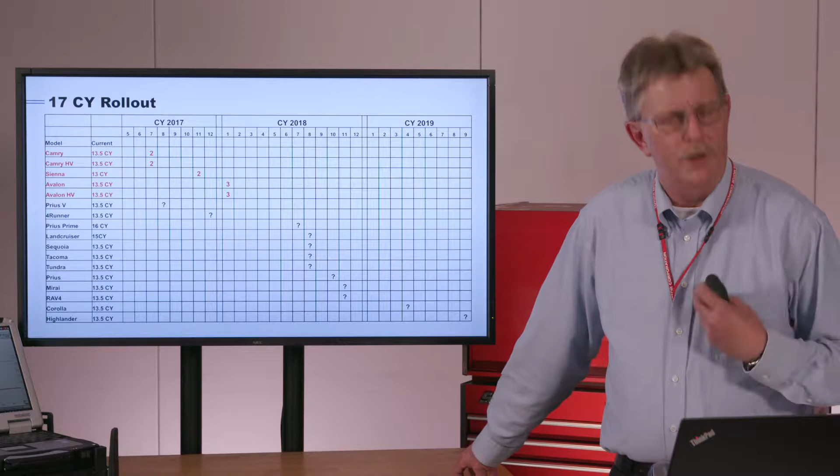Let's begin. This slide shows that 17CY introduction is rolling out in phases. The first phase, not shown on this slide, was the Lexus LC500 and LC500H, the one and only Phase 1 car. The 2018 Camry is the very first Phase 2 car, and in a minute we'll talk about the features included in Phase 2 and Phase 3.

You can see items in red on this slide. We're relatively sure of dates, features, and functions for those. Items in black indicate that we intend to roll out 17CY across the model line over the next couple of years, but the actual dates and models are subject to change. The items in red, we're really sure about.

You can see Camry rolling out in July of this year. Later this year, Sienna will roll out, and then early next year, as a 2019 model, the Avalon. This is a quick summary of the features and phases.

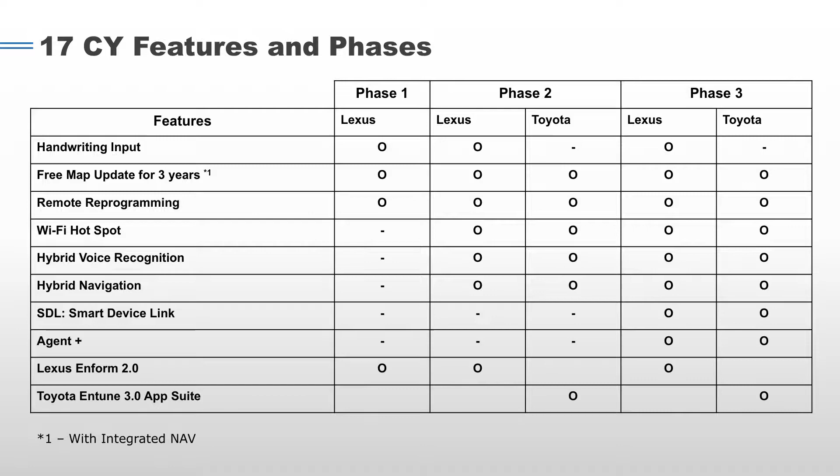Phase 1 with the Lexus includes handwriting input. Unfortunately, we will never get handwriting input as part of Toyota, since that depends on the remote touch that Lexus uses for handwriting input. There's also free map update for 3 years, which we'll talk about in detail.

That free map update feature is tied in with dynamic nav and dynamic POIs. Remote reprogramming is a possibility, though how that's actually implemented is not defined right now. Wi-Fi hotspot: the 2018 Camry is the first Lexus or Toyota vehicle to have an onboard Wi-Fi hotspot. Hybrid voice recognition and hybrid navigation are two features that are part of the premium package, and we will again talk in detail about those.

Smart Device Link is a Phase 3 feature rolling out, similar to some Apple or Google car telematics programs that let you add third-party applications to your cell phone and have them interface with the car. And for us, Toyota Entune 3.0 App Suite is a new version of the App Suite you're familiar with.

This slide is a representation of T-QTG-616A-D, which hopefully you're already familiar with. This quick training guide we produced is titled Entune Head Units. The update covers 2012 to 2018 model years, and we've had to make some minor changes to the formatting of the quick training guide to accommodate 17CY.

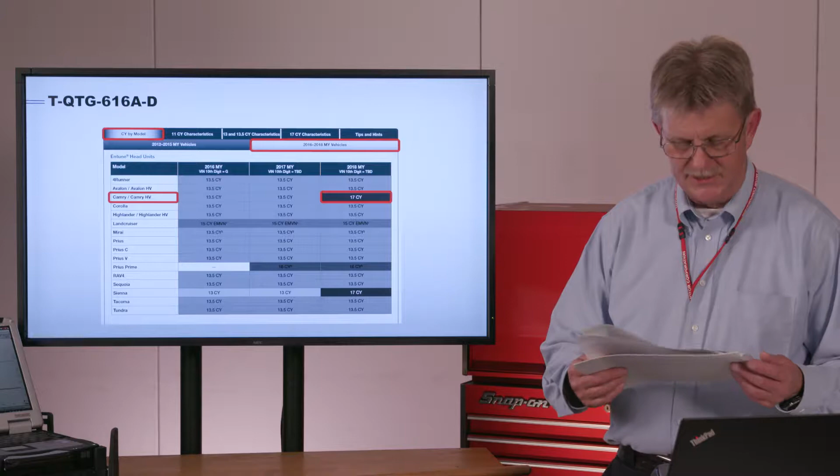One thing we added is a calendar year by model page or tabs that you use to identify which system your particular car has by looking at the car model and model year. We broke this up into two separate tabs: one for 2012 through 2015, and one for 2016 to 2018 model year vehicles.

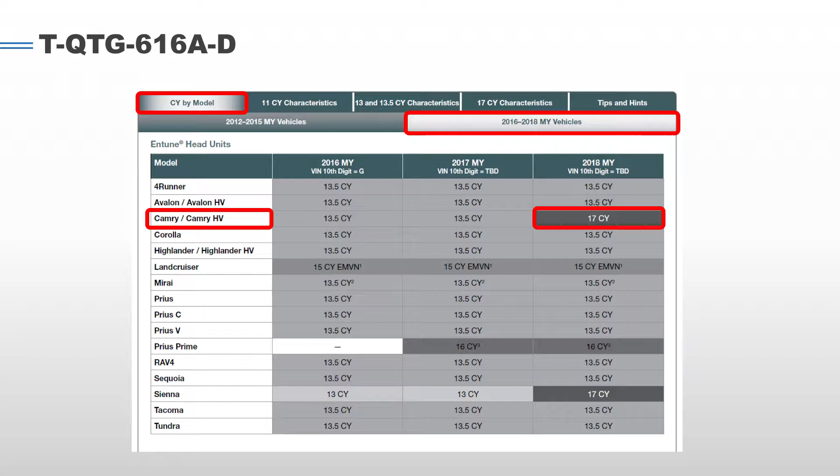Camry and Camry HV are the ones we're specifically talking about, and it shows those have a 17CY system. There's now a dedicated page for 17CY characteristics, and luckily we're still able to identify head units by specific physical characteristics on the head unit.

So, first and foremost, one of the big issues is: what system am I working on? By simply looking at the head unit and looking for the presence or absence of certain features, you can identify which one of the three different Entune 3.0 systems is included in this particular car.

We're looking for a CD slot. Does it have a CD slot? If it has no CD slot, it's Entune 3.0 Audio, the base system. If it has a CD slot but no map button, it's Entune 3.0 Audio Plus. And if it has a CD slot and a map button, it's Entune 3.0 Premium Audio.

Similar to the way the rest of the characteristics pages in the quick training guide are laid out, we talk about specific hardware features, specific unit names, information you need to find the correct reference document in TIS, in the repair manual, in the new car features, in the wiring diagram. We talk about features and functions, hardware. Does it have a separate amplifier? Is the amplifier encased in the head unit?

Here's a couple of new terms, DCU and MEU. You're going to have to learn those terms. We talk about whether they have HD radio, whether they have nav traffic, whether they have Sirius XM. So as a reference piece to figure out which system you have and what features and functions that system has, this is a very valuable reference piece.

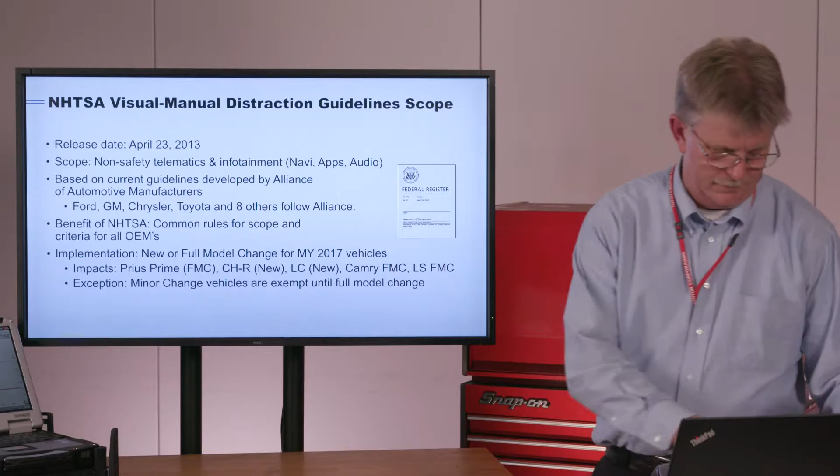This is a corporate decision to follow these guidelines. The decision is based on reaffirming our commitment to safety, our top priority, and consistent with our design philosophy to limit cockpit distraction. So this was approved by the TMNA CEO, the TMNA president, the research and development president. This is approved and implemented at the very highest level.

NHTSA driver distraction guidelines are, again, released in phases. Phase 1 involves the cockpit interface and the original equipment manufacturers. Phase 2 guidelines are related to portable electronic devices, and Phase 3 guidelines are related to voice commands.

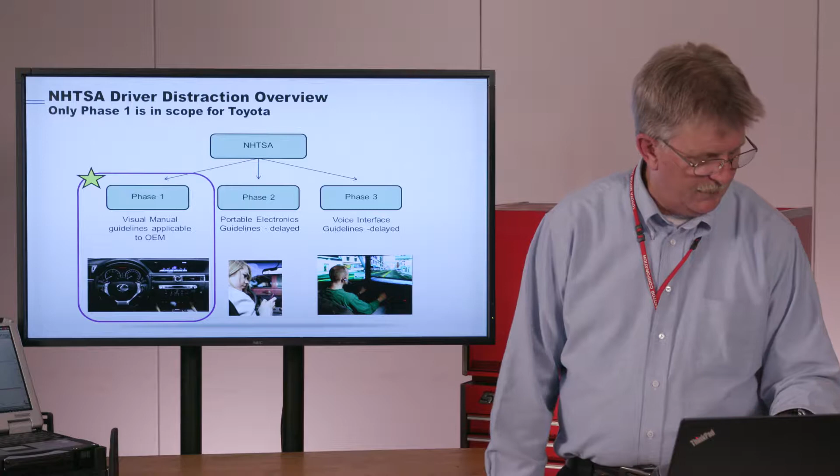In the student handbook version of this, there is quite a bit of detail taken from the original NHTSA guidelines document. If you're interested in the background, some of the standards, how the tests are developed and things like that, I would recommend you at least start with the student handbook, and you may even want to refer to the original document for the guidelines.

Our design standards mean that 3D maps, detailed images, the phone keypad, messaging, and text entry will no longer be available while the car is moving.

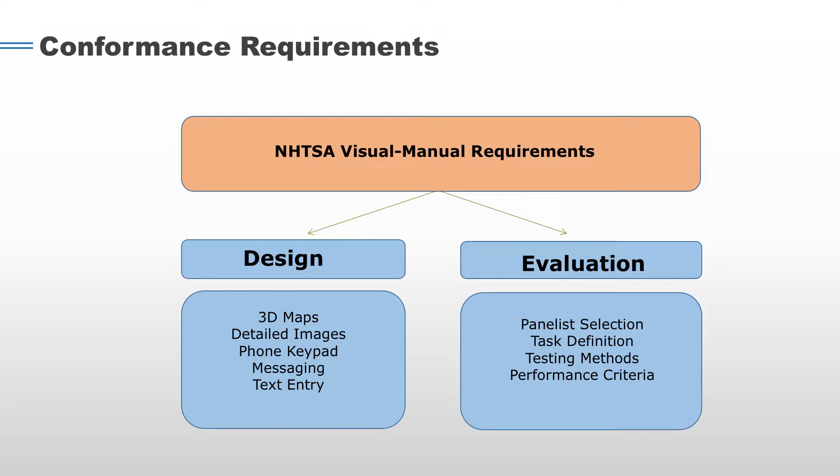The evaluation is done by a group of panelists, and we'll talk a little bit about selecting the panelists, how they define the tasks, what test methods they use, and some of the performance criteria as they work to minimize the distraction of using or operating the infotainment system in the car.

Some of the key guidelines: we have to reduce the task time limit. So the previous task time limit was 20 seconds, now it's down to 12 seconds.

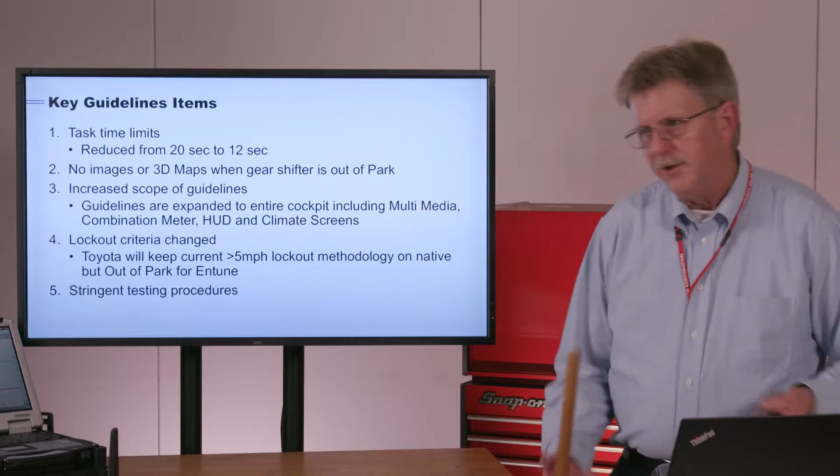No images or 3D maps when the gear shifter's out of park. Gear shifter's out of park, or the other criteria you'll sometimes see is the parking brake is off and the car is moving faster than 0.62 miles per hour.

Increased scope of guidelines. The guidelines are expanded to include the entire cockpit, not only the stuff displayed on the information screen and navigation screen, but the multi-information display between the tachometer and speedometer is included. Climate screens, heads-up displays—the idea is to minimize distraction from the driving task.

The lockout criteria have changed, and the most liberal lockout criteria is 5 miles per hour. At 5 miles per hour, icons and the ability to manipulate or go deeper into levels and layers of menus will be locked out, and they have very stringent testing procedures and methodology established.

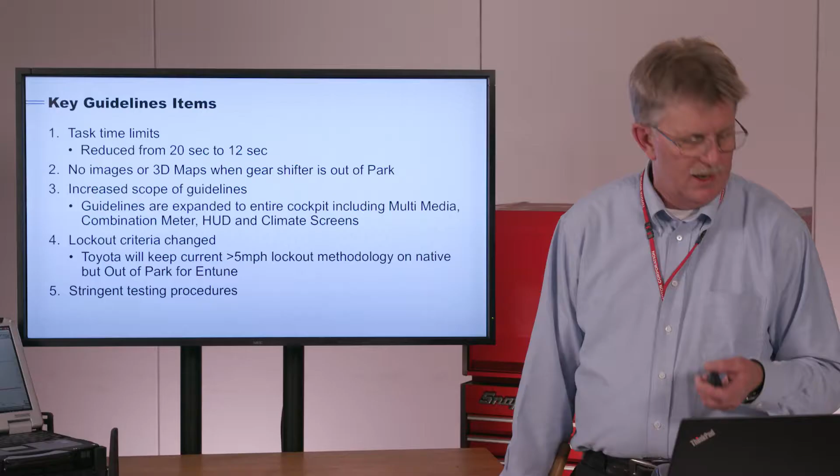In the handbook, there's a little bit more information. They have a method they call the occlusion method, and then they have a simulator that lets them track eye movements to make sure that during operation of these telematic system tasks, your eyes are able to remain on the road, focused on the driving task, versus glancing down at the screen to manipulate or operate it.

This next slide is a summary of changes in the specifications for driver restriction. There's what the 13.5 and 15CY systems did, and on the far right is the 17CY column.

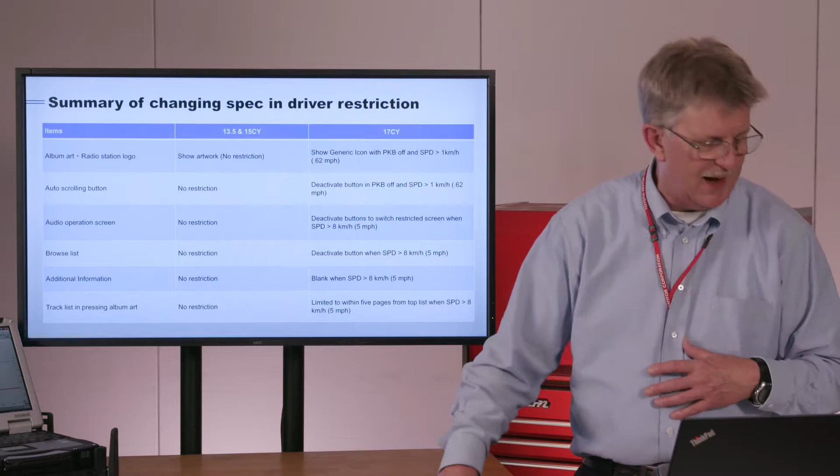Album art, the little pictures that showed what the cover of the album looked like, or a radio station logo or things like that, will disappear at 1 kilometer per hour, 0.62 miles per hour, to be replaced by a generic icon. Some of the scrolling features we'll look at in detail—auto scrolling, information buttons, things like that—are going to no longer be available. They'll be grayed out at 0.62 miles an hour.

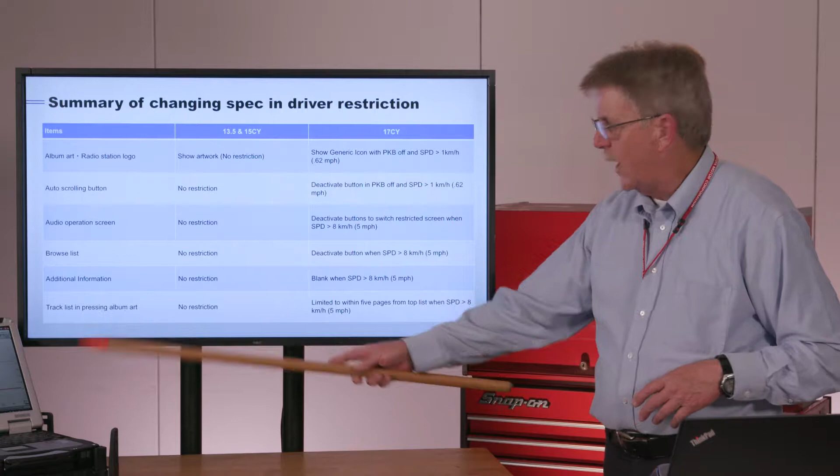Audio screen operations will be limited. Browsing lists will be limited. Additional information buttons will be limited. And track lists in album art will be limited.

Browse and additional information buttons: there used to be a browse section, and in your particular audio source you could browse through and see the artist list, artist name, by genre, whatever. Once the car starts moving again, at 5 miles an hour, that browse button is disabled. The additional information that would tell you about artist name, music title, radio station logos, and things like that—again at 5 miles per hour, that button is no longer available.

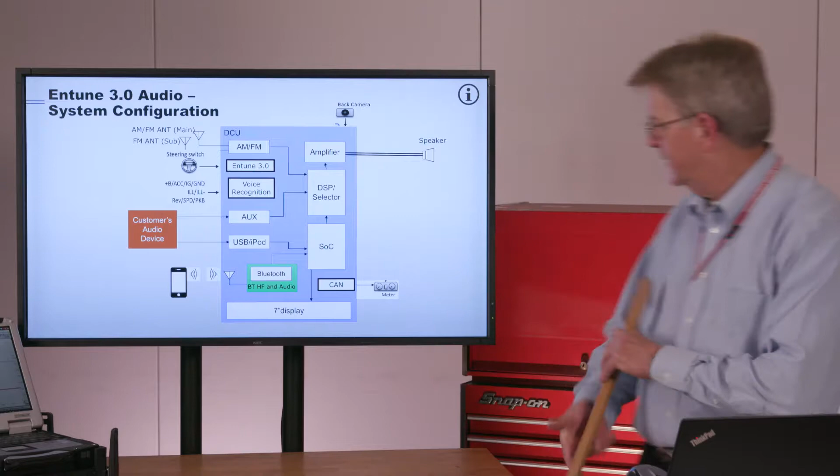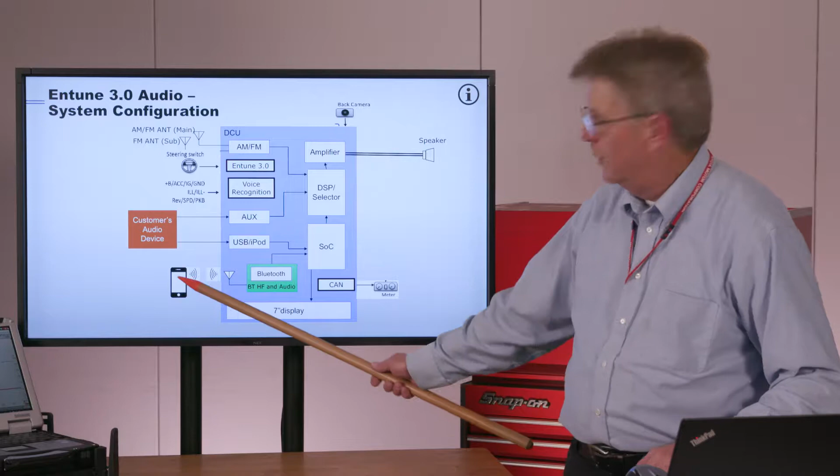CAN communication goes out to the meter ECU and the 7-inch display. The Bluetooth module and antenna are located inside the DCU, so there's a Bluetooth connection with the cell phone. The customer's audio device connects either to the aux or the USB port.

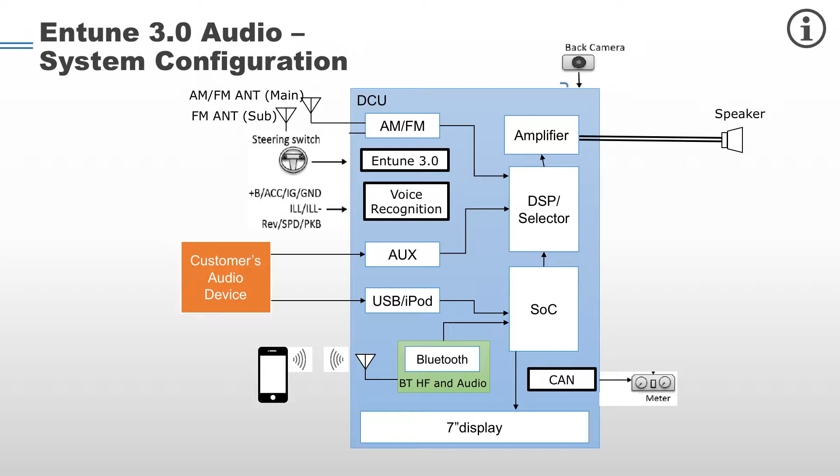All of these items, plus B, ACC, ignition, ground, illumination, reverse, speed, and the parking brake signal, are all discrete, separate, single wire inputs to that system. The steering wheel switches are a separate single wire input, and AM/FM antenna and sub antenna are outside inputs.

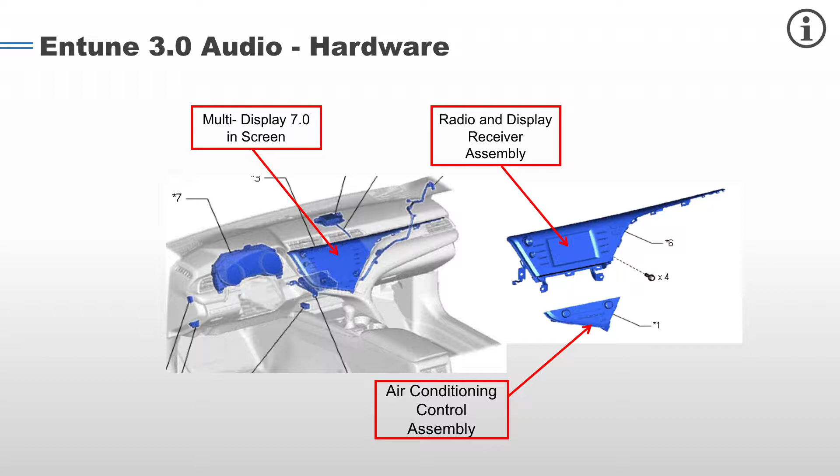Hardware: a 7-inch screen incorporated into this large piece of the dash, and this system only has a separate air conditioning control panel assembly. On the next two systems we're going to look at, the air conditioning control panel assembly is part of the radio and display receiver.

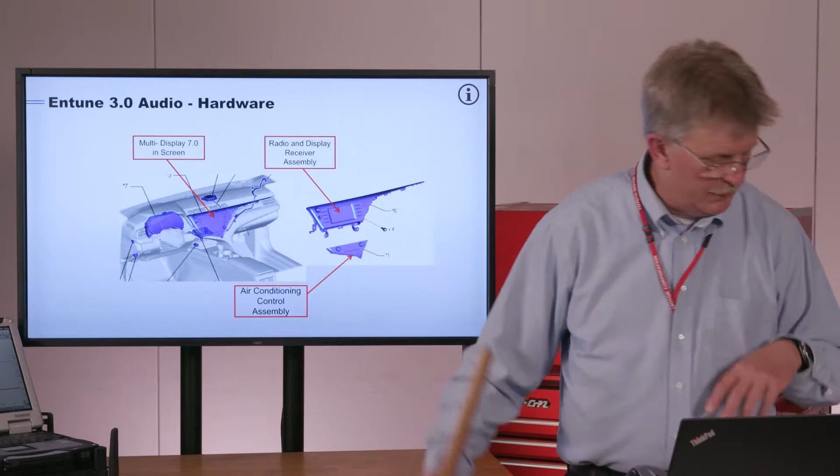There's no DCM, so we won't be pointing out where that's located. There's no navigation ECU — that's part of the premium system.

Stepping up to Audio Plus now, Entune 3.0 Audio Plus is the next level system up. This system adds some features and functionality. It incorporates a DCM, and the connected services become available.

The key identification characteristics: it has a CD player slot, but no map button. That means that's Entune 3.0 audio. 3.0 audio is also available with an optional JBL system — we'll talk a little bit about that.

Keys to identify: 8-inch touchscreen, CD player slot. It is DCM equipped, so connected services — Safety Connect, Service Connect — are available. The navigation system is, again, the app-based Scout GPS Link.

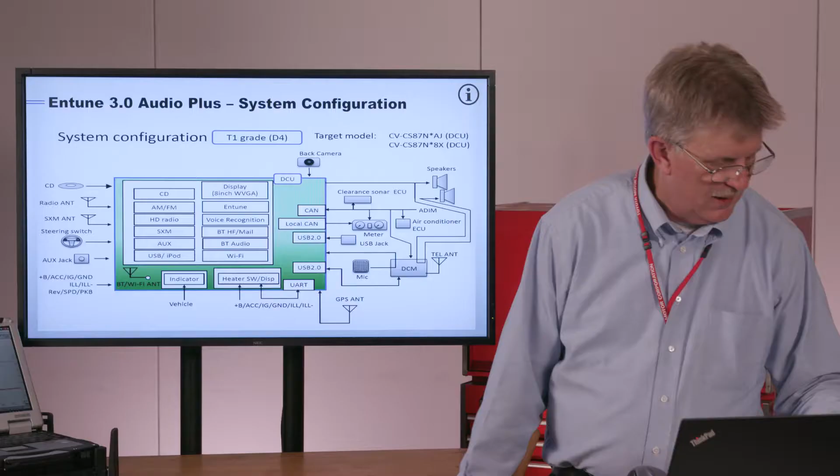The DCM is the component that enables the Wi-Fi. So our inputs, once again: radio antennas, steering wheel switches, the aux jack, plus B, accessories, ground, illumination, reverse signal - those are all discrete, separate wire inputs.

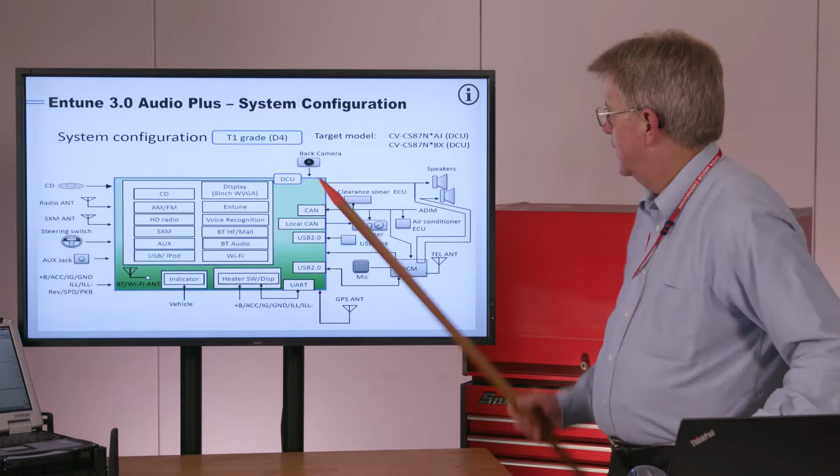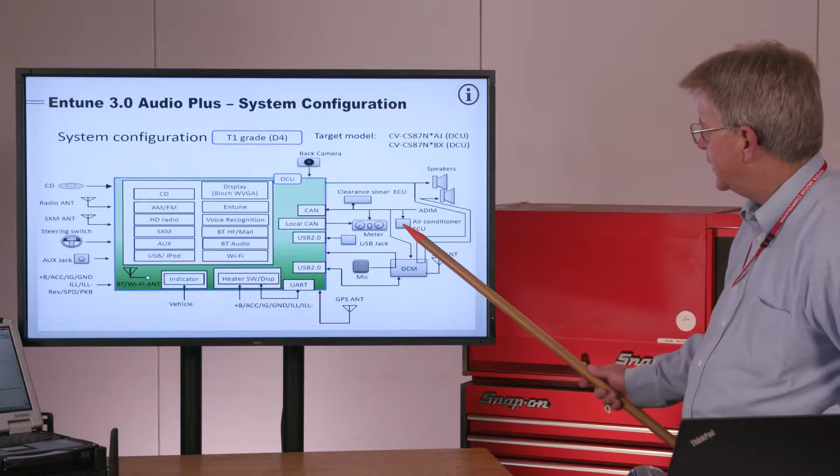Backup camera is a separate input, not through a network, through the NTSC standard. Speakers, we've got a local CAN to the meter, CAN communication out to the air conditioner ECU, and USB communication between the DCM and the DCU.

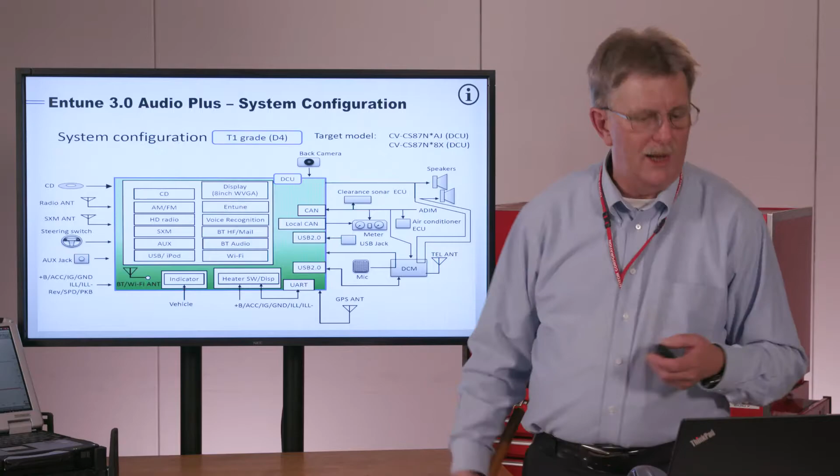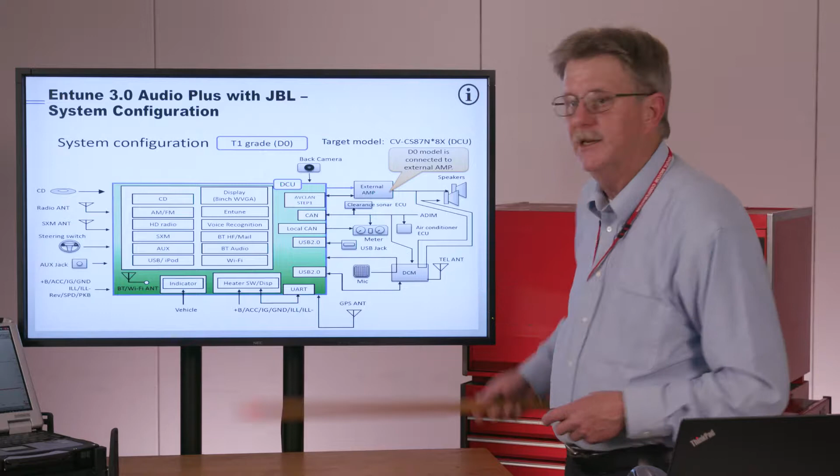Going from Entune 3.0 Audio Plus, our next slide is a system diagram for the JBL option, and probably the key piece right here is the external amp. The JBL option systems have an external amplifier located under the driver's seat. Again, the characteristics, inputs and outputs are similar, but instead of driving the speakers directly out of an amplifier located inside the DCU, we're driving the speakers out of an external amp located underneath the seat.

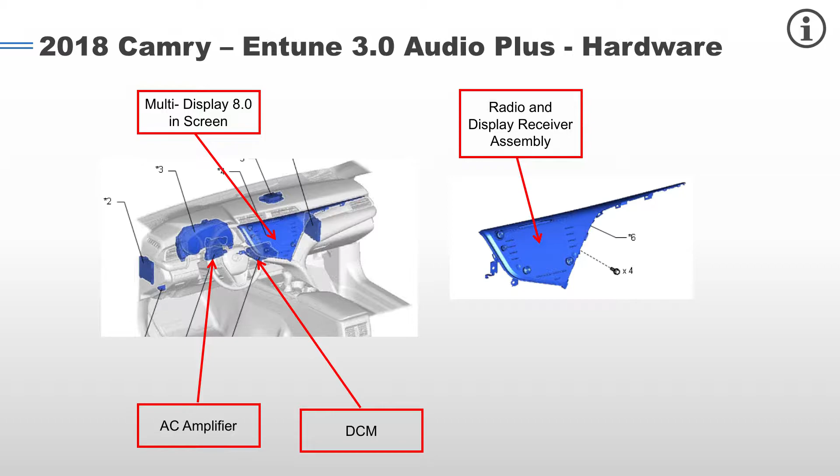JBL systems include 9 speakers. Hardware: again, we've got the big panel in the dash that includes the multi-display backed up behind or incorporated into the same unit, the DCU, the display control unit. Notice that the air conditioning input panel is not a separate piece in this system anymore.

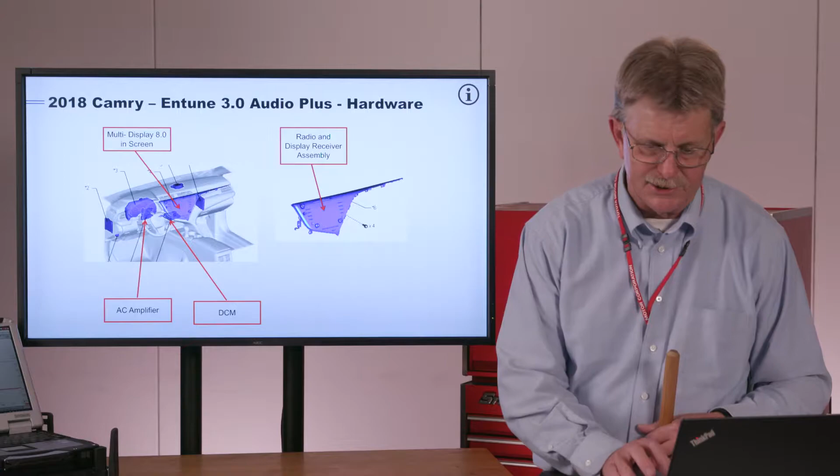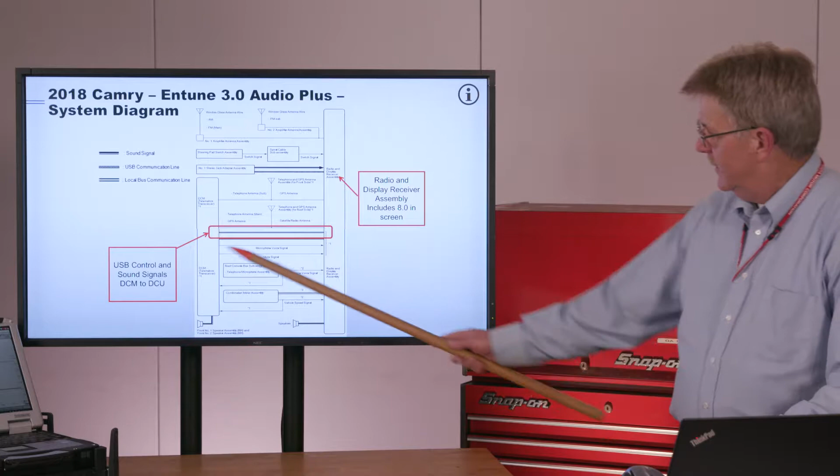Same block diagram you saw before, except this time we didn't block out the DCM, the data communications module, the telematics transceiver. Highlighted in red here are the USB control and sound signals that pass back and forth between the DCU, the display control unit, and the DCM, the data communications module.

Very top level system, Entune 3.0 Premium Audio. Key identification characteristics for this are a CD slot and a map button. This system adds an extra component and becomes much more like the traditional navigation systems that you're used to now. So, CD slot, map button - you've got an Entune 3.0 Premium Audio.

It has a DCM, it has all the connected services, plus the DCM enables the dynamic voice recognition, the dynamic navigation, and the other things we're going to talk about in detail.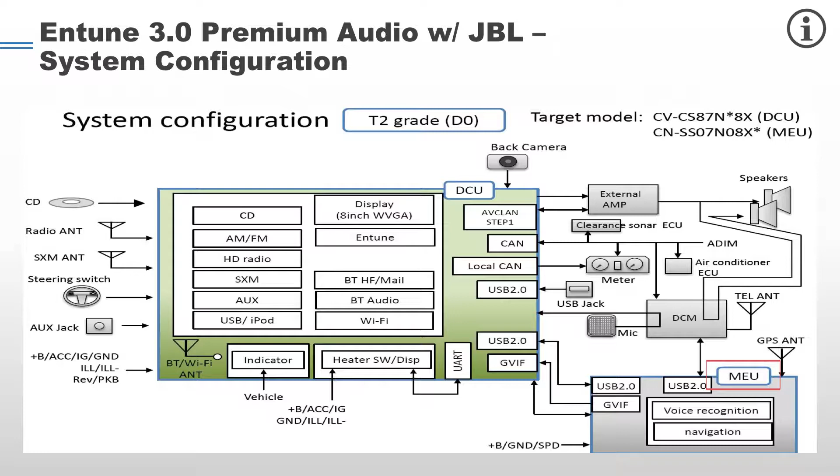Our block diagram shows that this particular model has this new feature. This is the key part of this diagram - another new term, MEU, Multiplex Extension Unit. The reason it's important that you remember or know about MEU is when we get to the diagnostics section.

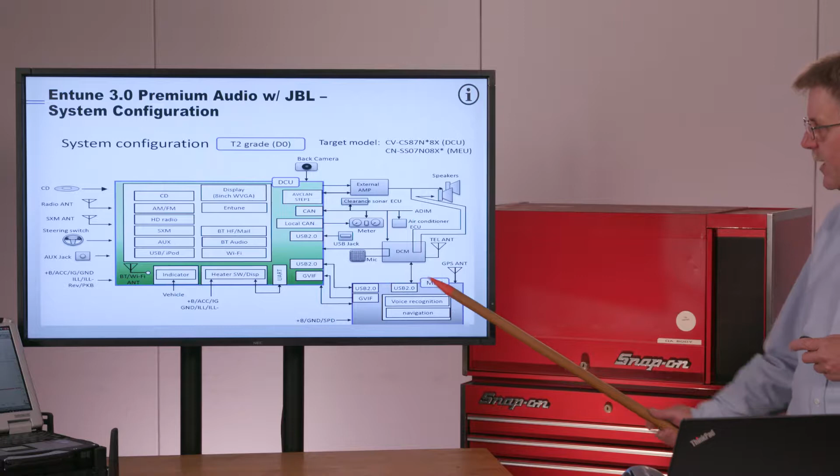If you pull up the on-screen head unit diagnostics, they're going to identify the units using this terminology. If you're looking for diagnostic trouble codes, if it's in the head unit, it's going to be listed under the DCU category. If it's in the navigation ECU, it's going to be listed under the MEU, the Multiplex Extension Unit.

Discrete inputs, again, like we talked about: plus B, ACC, auxiliary jack, USB communication. There are 2 kinds of signals that go back and forth between the MEU and the DCU - one is a USB 2.0 line, the other is GVIF, Gigabit Video Interface. The video images that show up on the 8-inch display in the DCU are transferred from the navigation ECU via a GVIF cable.

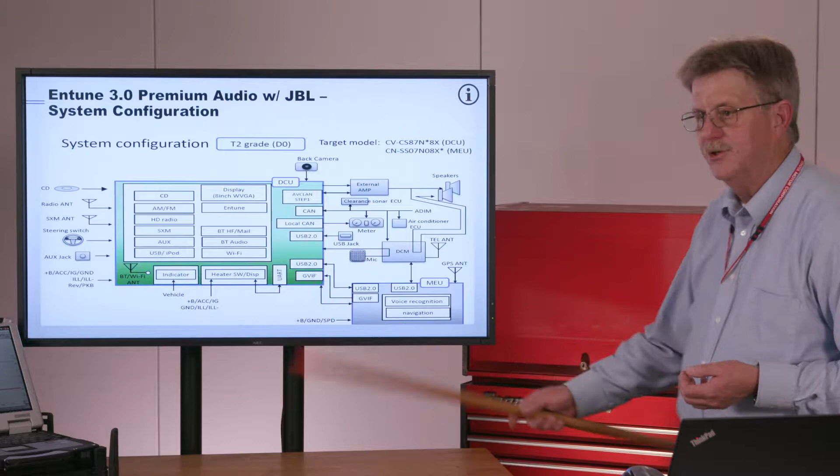It's a separate unit. We'll look at the location also. And then notice also now there's a communication link, USB 2.0, between the DCM and the MEU.

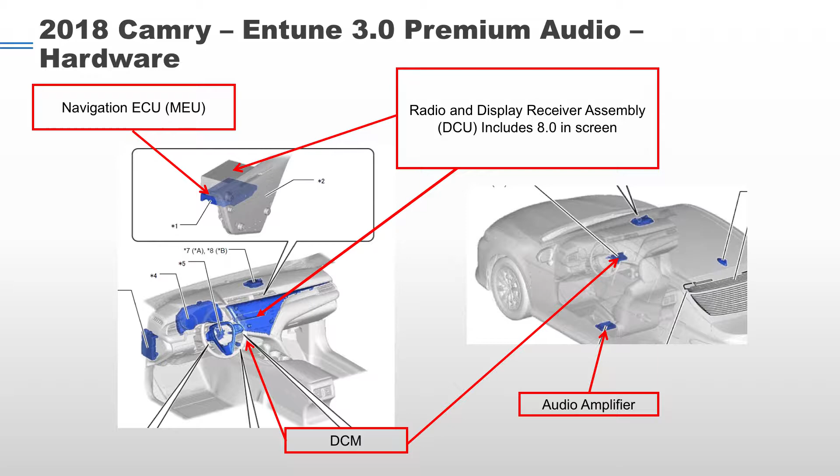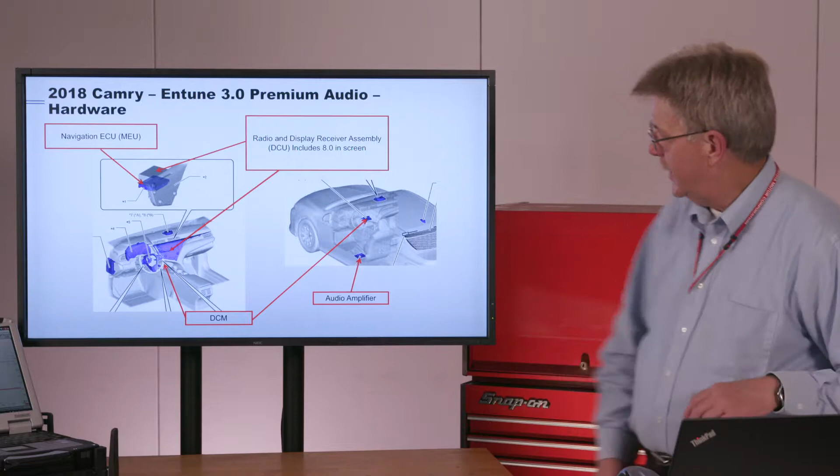Entune 3.0 premium hardware. Very difficult to see because it's tucked underneath the radio, but the DCM is in the same location in 3.0 Audio Plus and 3.0 Premium, and the additional unit piggybacked onto the bottom of the DCU is the navigation ECU, the MEU. The audio amplifier - this system has JBL like the Audio Plus with JBL - is located underneath the driver's seat.

System diagram on this one - we've zoomed in a little bit on it because it's very big. If you want to look at the full system diagram, remember that the repair manual and new car features book references are included in the printed handbook.

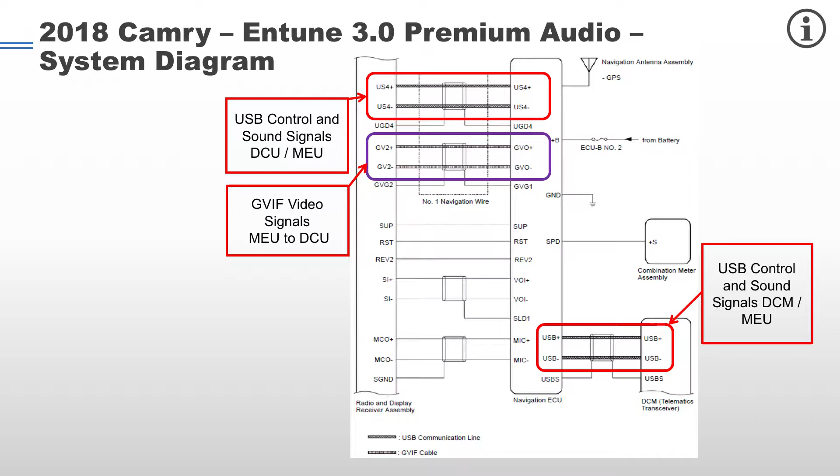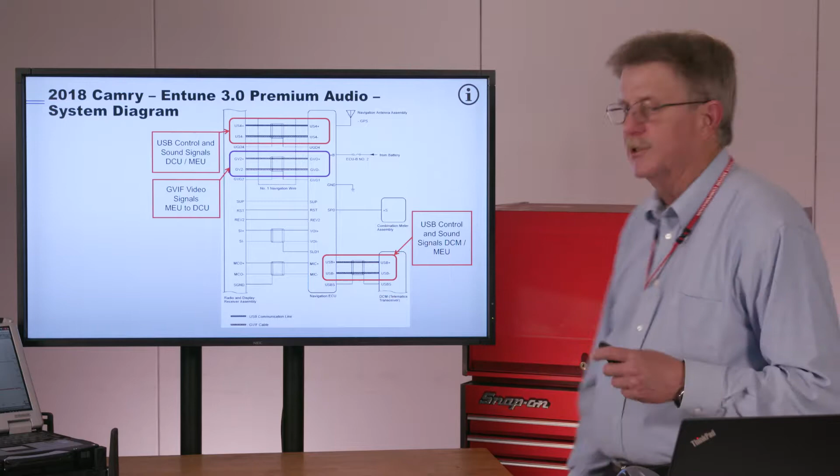We've highlighted the USB control and sound signals between the radio and display receiver and the MEU, and the gigabit video interface. And then again, the USB 2.0 control signals between the nav ECU and the DCM.

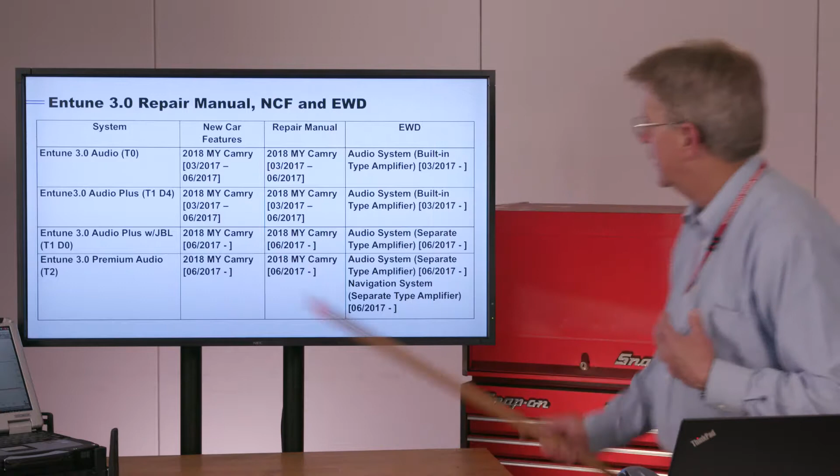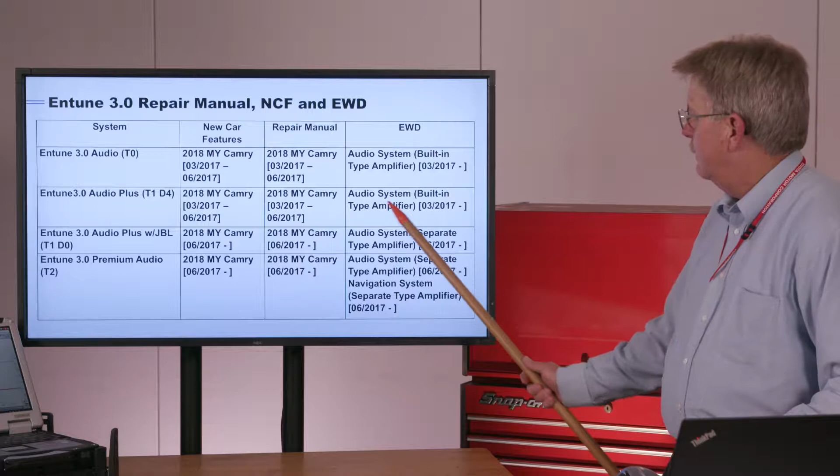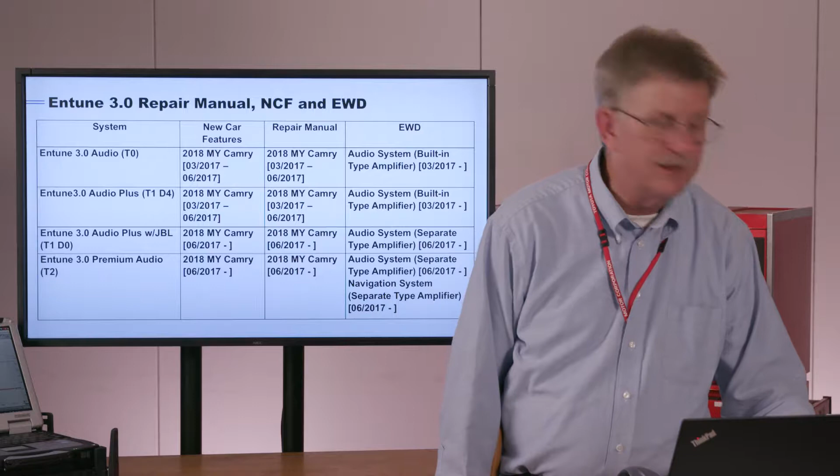In the repair manual, same terminology. In the EWD, you're looking under audio system with the built-in type amplifier. If it's Audio Plus, again 3 2017 through 6 2017, built-in amplifier. When you step up to Audio Plus with JBL, you have to change the sections of the repair manual and the new car features book you look at. Now you're interested in 2018 model year Camry, 06 2017-Infinity.

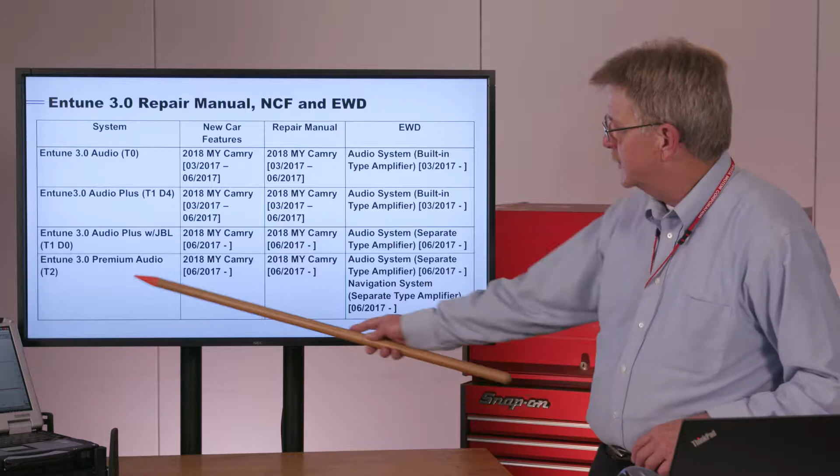The wiring diagram changes to audio system separate type amplifier, with the same set of characteristics for Entune 3.0 audio. The reason it's important to know the terms DCU and MEU is that they're used in diagnostics, and here's a little bit about the reasoning and physical construction.

The MEU, which we used to call the navigation ECU and probably still will, operates the navigation system, the voice recognition function for dynamic voice recognition, and is the control center for communication services going out through the DCM. The radio and display receiver assembly, the DCU, handles the audio system, the audio tuner, vehicle customized functions, and in the upper level systems, air conditioning screens.

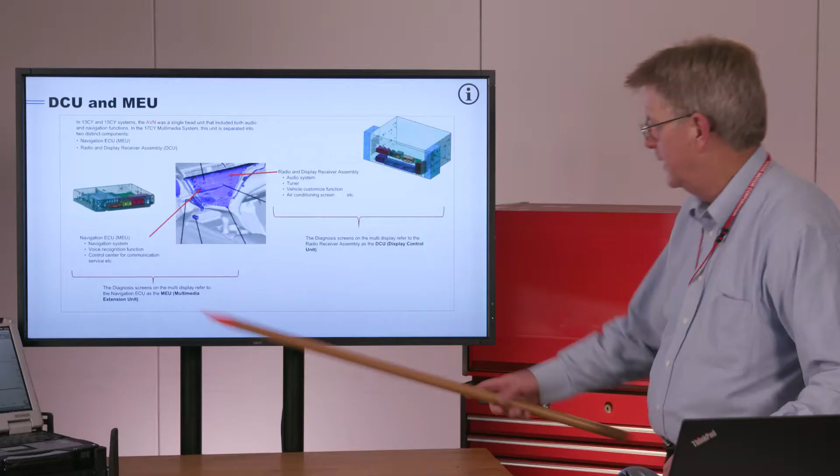The diagnosis screen on the multi-display calls what we used to call the navigation ECU an MEU, multimedia extension unit. Diagnosis screens on the multi-display call the radio and display receiver assembly a DCU, a display control unit. DCU and MEU, a little bit of information pop-ups.

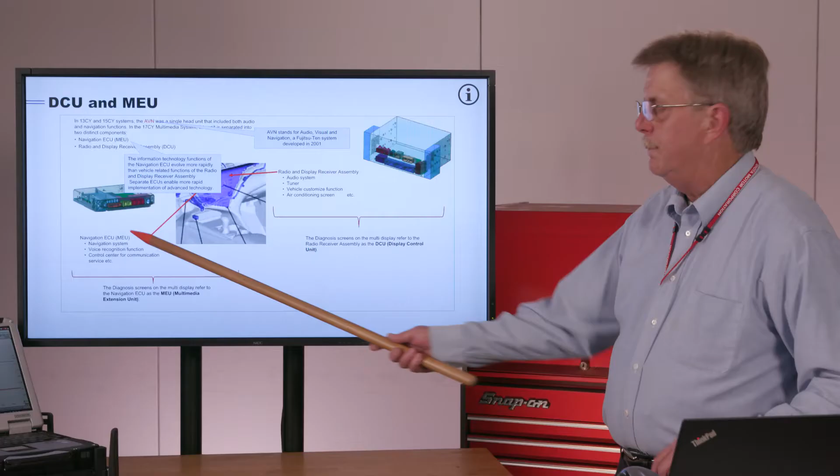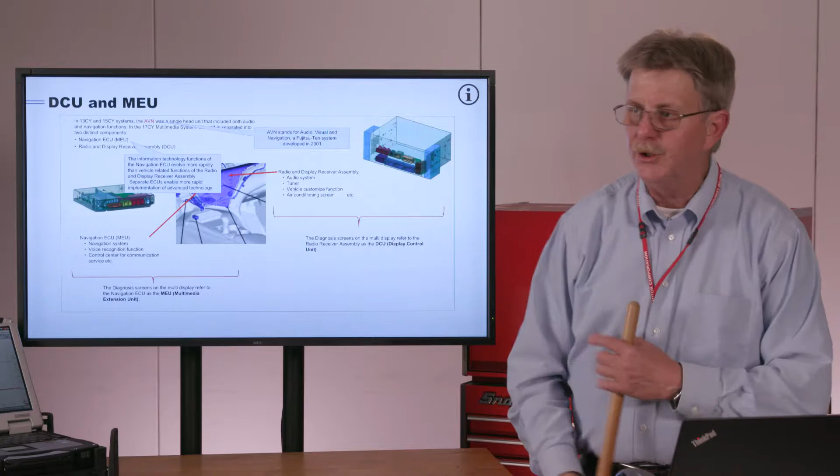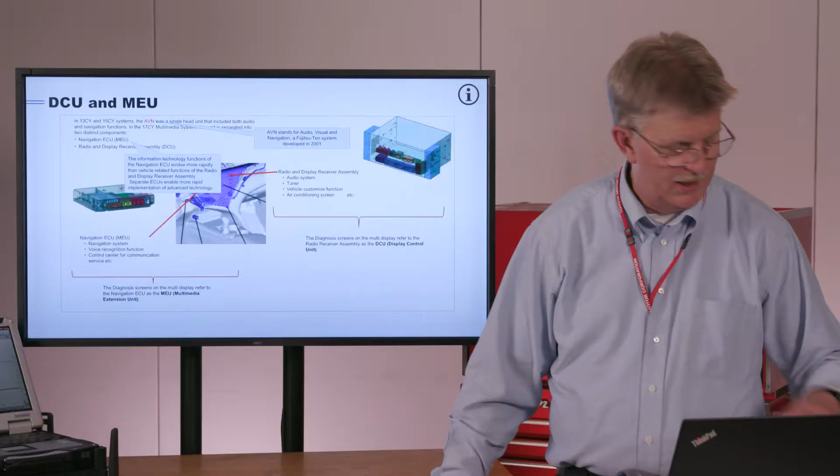Because the information technology related to the DCM and navigation changes much faster than audio system technology, they've separated them into two different units to make it easier to update the MEU independently of the DCU. The previous generation, 13, 13.5, and 15CY, called this head unit on the diagnosis screens AVN, Audio Visual and Navigation, a Fujitsu Ten term. But now, if you're looking at diagnosis screens, you need to know the term DCU.

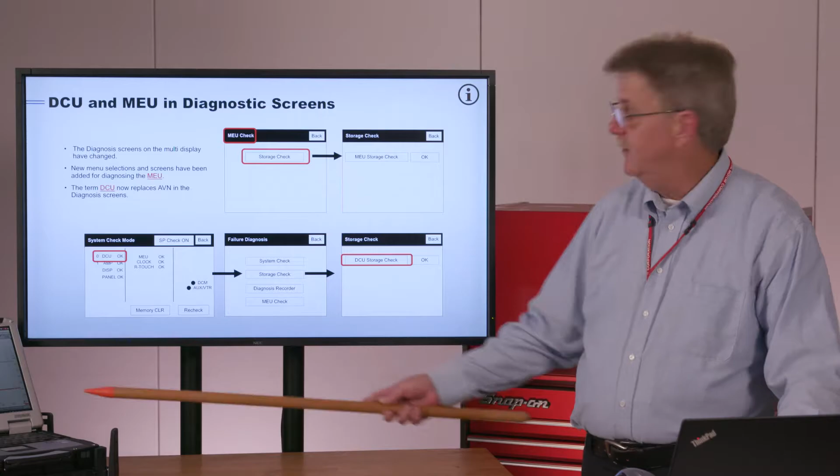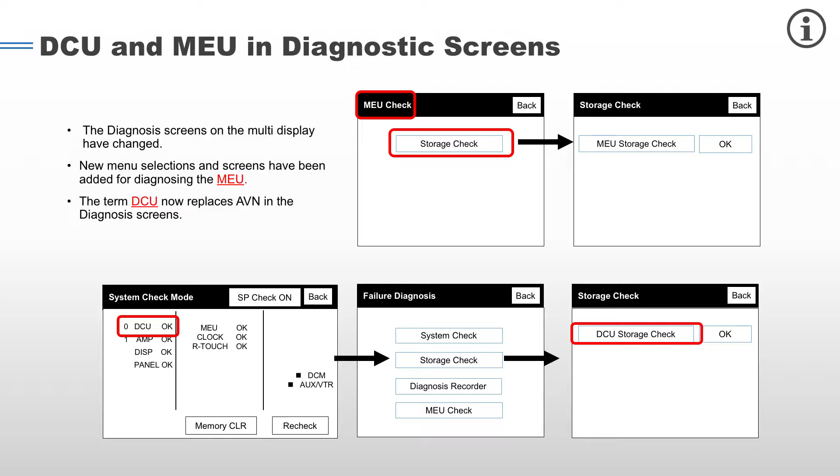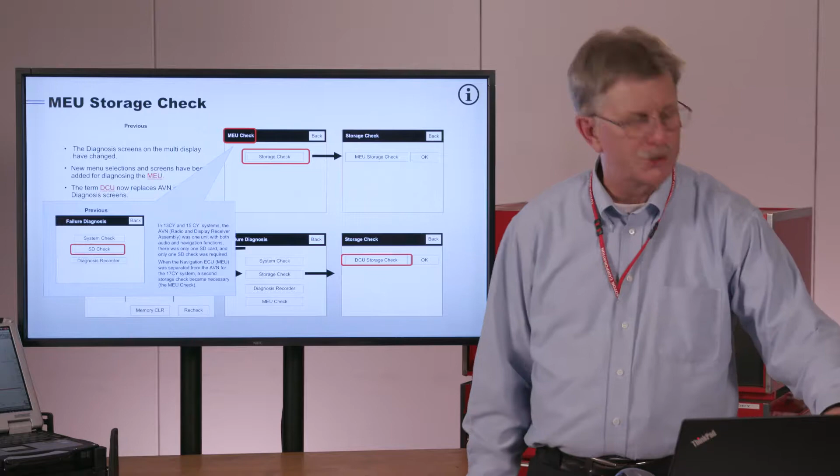There's a storage check, and there's storage in both devices on the premium system - the DCU storage check, and there's also an MEU check for MEU storage. The pop-up explains a little more: in 13, 13.5, 15CY, the only storage device was the SD card embedded or available in the slot. In 17CY, the premium system has storage in both devices, the DCU and the MEU.

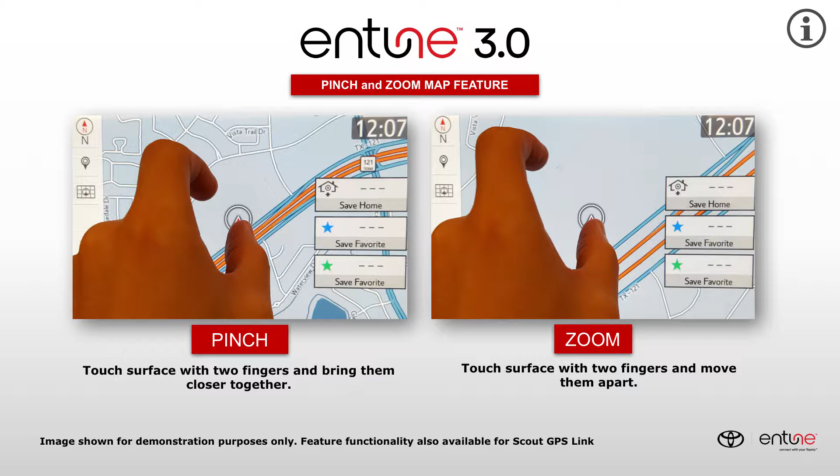The text in the handbook says, this is not a Tyrannosaurus Rex about to eat the CVT Operations Center in Lewisville, Texas. This drawing is intended to show that pinch and zoom features are available, and scroll and swipe features are also available across all three different units.

Next up, we're going to go into DCM-equipped remote services: Safety Connect, Service Connect, Remote Connect, Wi-Fi Connect, Destination Assist Connect, Dynamic Navigation, and Dynamic Voice Recognition. DCM-equipped cars are enabled for remote services, which are based on cellular communication through the Verizon 4G LTE cell phone built into the DCM.

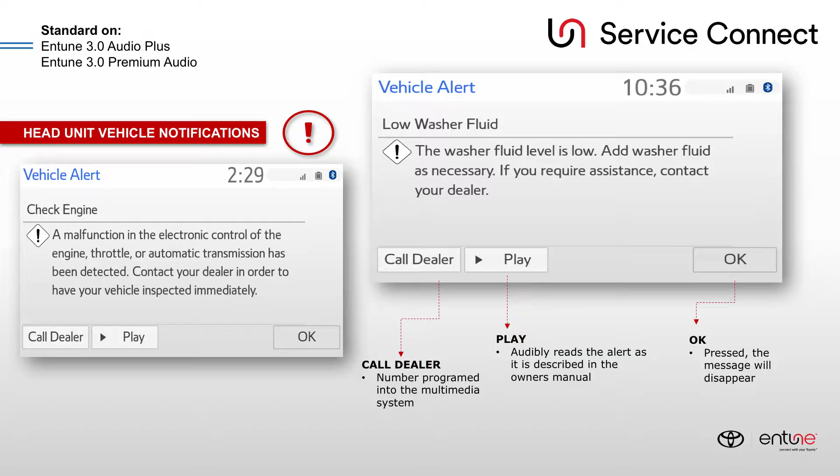It says a malfunction in the electronic control of the engine throttle. This is like a DTC, a check engine light. The head unit's going to pop up information like this. This is a vehicle alert: washer fluid level is low.

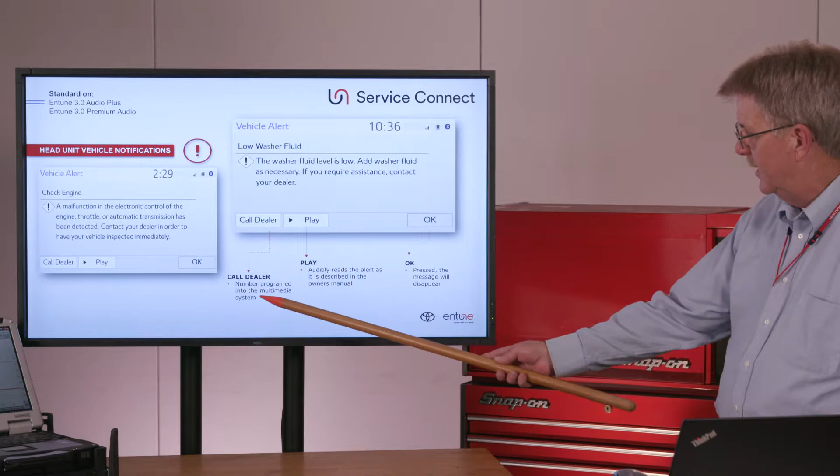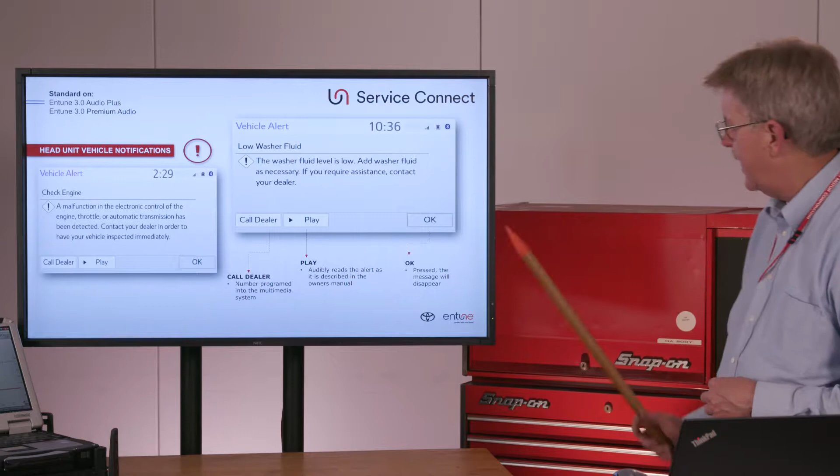A maintenance alert would look similar or whatever. By touching call dealer, the number you programmed in will, through the customer's cell phone, call the dealer. The play button basically reads the verbiage in the owner's manual about the nature of this particular alert and the interest level the customer should have. If you press OK, the alert will disappear.

Maintenance alerts are available to both the customer and the preferred dealer, so the dealer gets maintenance notifications. It allows the dealer to proactively contact the customer. In theory, someone at the dealership could monitor maintenance alerts. They can be assigned to specific service consultants, ASMs, and things like that, and the dealer can access customer maintenance alerts via the alert screen on Service Lane.

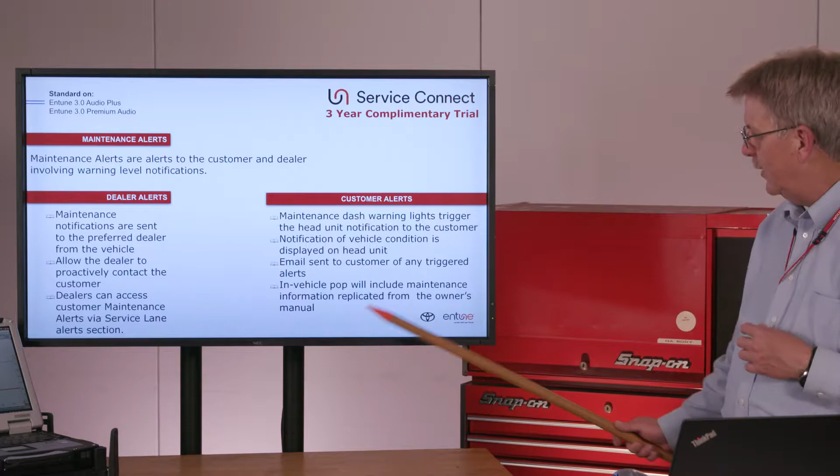Notification of the vehicle condition is displayed on the head unit, and an email is sent to the customer's email account. For example, a husband out driving and the wife at home - the husband can call the wife and say, hey, look for an email to tell what this particular alert is about. There's also a vehicle health report they can trigger, and maintenance information.

If they push that play button, the information in the owner's manual will be read to them so they can understand what that warning light means, and what's the severity of it. This information is available from your desktop or laptop computer via a vehicle health report. Vehicle health reports happen monthly on a scheduled basis, and they're also available on demand. There's also an app for your cell phone that you can go in and look at results.

It's very important that you understand, and important you pass along to the folks at the dealership: if the car has an active Service Connect subscription, when you bring that car in to do any kind of service work that potentially involves creating a warning light or a diagnostic trouble code, follow these steps. You need to put the vehicle in service mode. To do that, and prevent false malfunction transmissions, connect the TechStream to the DLC.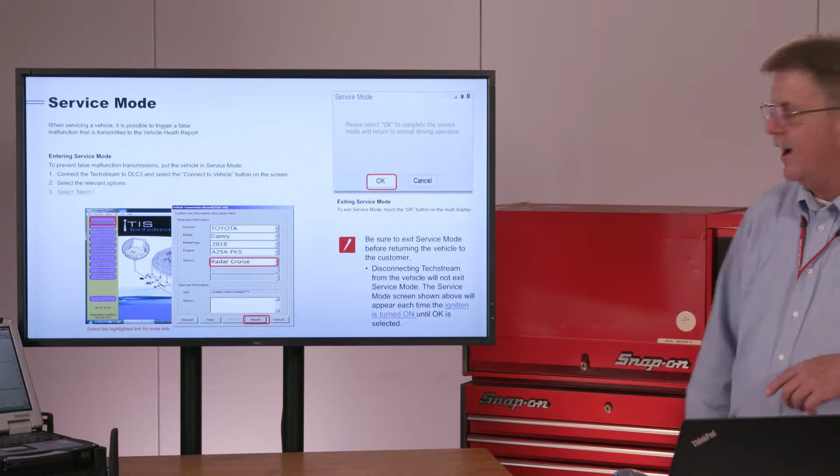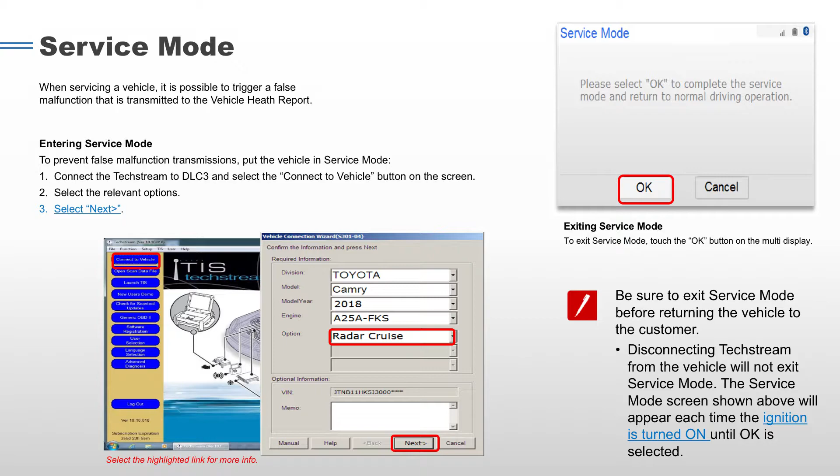At the end of that process, when you're all done, the technician's driving it out to park it in the lot or get it washed. He's done, everything he's going to potentially do to the car is done. When you turn the ignition on to drive the car out of your stall, you'll see a pop-up message on the head unit that says the vehicle is in service mode, and asks if you'd like to select OK to complete service mode and return to normal operation.

If the technician does not do this operation, the customer will see this screen, and that'll be sure to provoke some questions. If the technician says yes, okay, let's exit service mode, the system returns to normal operation and we'll broadcast malfunction alerts, all the vehicle alerts, all the other things.

Worst case scenario, the technician forgets to put the car in service mode, does some sort of operation that creates a DTC or causes a warning light to come on. The customer picks their car up from service, drives home, and finds an email waiting for them that says your car is broken.

So again, very critical, technicians are going to have to learn to watch out. The 2018 Camry is the first car that has this functionality. It'll give them a good break-in period, but for the 2018 Camry, system identification is important. Only the 3.0 Audio Plus and 3.0 Premium Audio have this function.

So if a technician pulls in a car with 3.0 Audio Plus or 3.0 Premium Audio, probably the best bet is to just make the assumption they have an active Service Connect subscription. If you're curious, you can go on Service Lane and find out if they have an active subscription. But probably it's better to just grab the TechStream, connect it up, do the process, let it get all the way through to the screen that tells you it's connected to the car, take the TechStream away, and do whatever with it. At the end of the process, don't forget to push OK and exit service mode. That means the car will not generate false malfunction transmissions, the customer won't receive a false malfunction vehicle alert, and the service process will go smoothly.

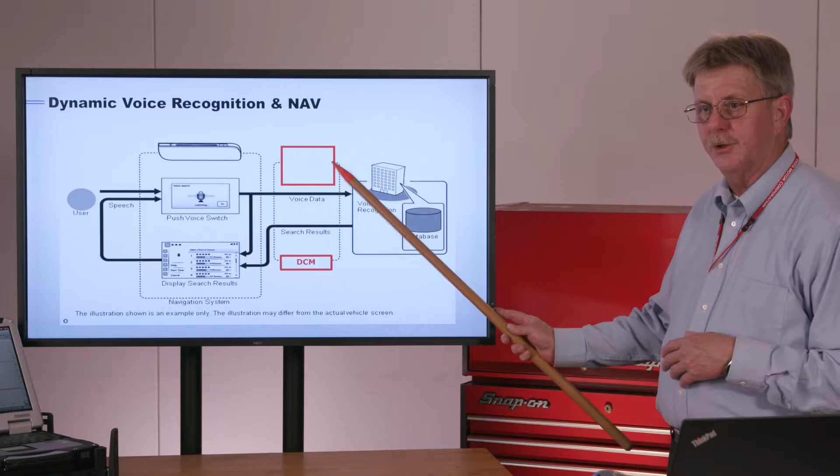Dynamic voice recognition and nav. This particular slide has 2 big red boxes on it for a reason. This one again came from a Lexus presentation, but it's the best representation we have. If you go to the document in the Lexus presentation, underneath here is a picture of a handheld cell phone, and underneath here is wording that says cellular phone. These 2 boxes are here on purpose.

This function is not based on the customer's handheld cell phone. It is based on the cell phone in the DCM. That's why these 2 boxes are here, to block those images out and make this graphic clearer.

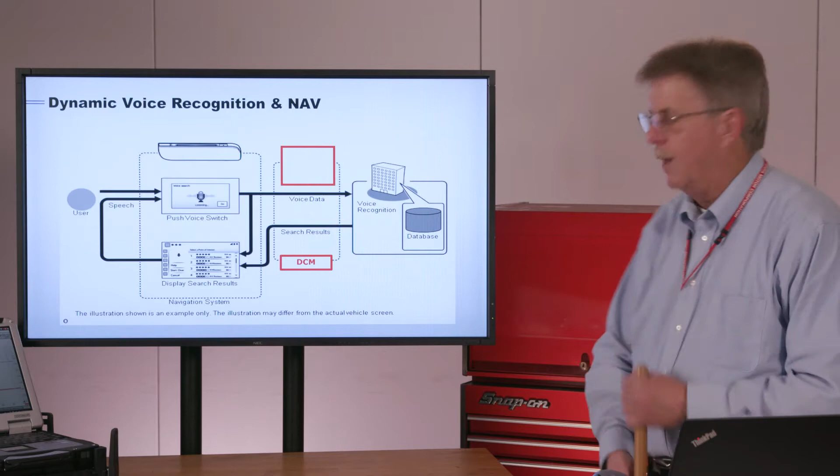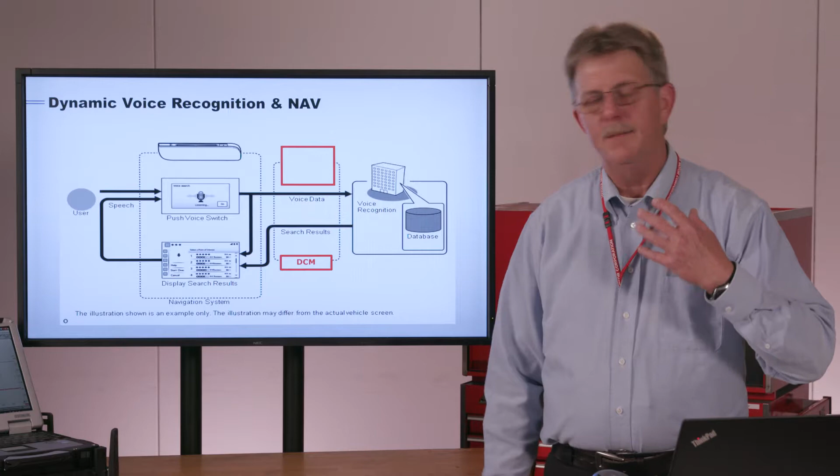So I'm going to use voice recognition and do a voice search. First place it's going to go is to the onboard navigation system and look at the POI categories, or look for the address, or do things like that. If that doesn't produce results, the system is capable, via the cell phone and the DCM, of going out to different cloud-based servers, trying to match up your voice recognition, trying to match up a POI that may be new, different, or better fits the category you're looking for.

Dynamic navigation features. There's a notice here that says you've received a dynamic route. We'll talk about dynamic route, but the dynamic navigation features mean you always have the most updated maps, and again, using the cell phone in the DCM, it takes into account traffic alerts, cloud-based information, and something they sometimes call one-box POI search, which is an enhanced point of interest search, again based on more than just the POIs stored in the onboard map.

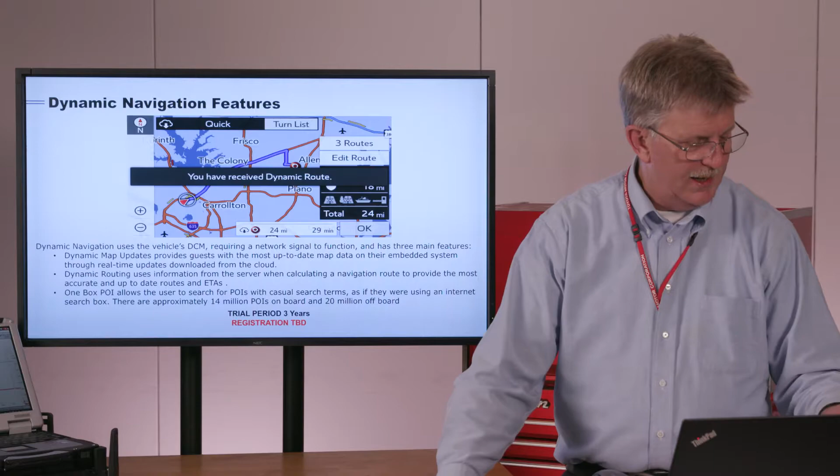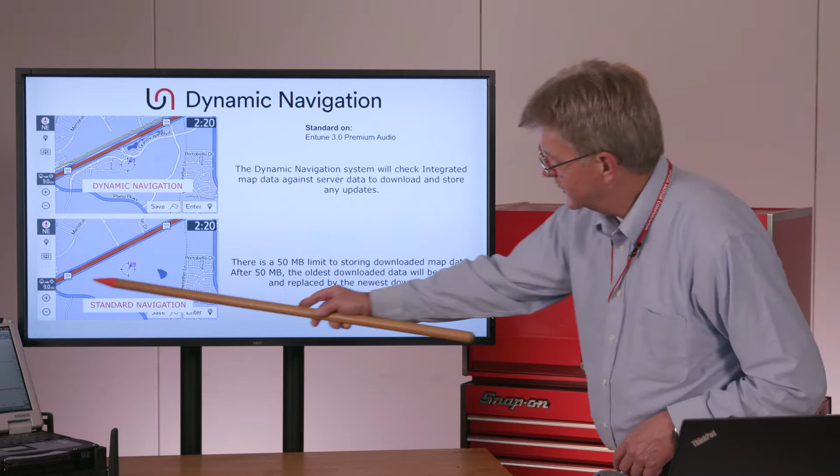This is an example of dynamic navigation. The standard navigation map does not include this area because the map is older and the area has been built up since. Because you have dynamic navigation on your 3.0 Premium system, it'll check the integrated map built into the system against cloud-based maps and download the new and updated information, storing it onboard in the car. There's a 50 megabyte limit to the amount of information that can be stored. At 50 megabytes, the oldest data rolls out and the newest data rolls in.

Dynamic routes take into account the new roads that are built up, and this little cloud icon is important to find out if dynamic route is turned on and active, and the system has based your route on updated cloud-based information, this cloud icon shows up. So for this one, around the north side of Dallas, the quick route, the short route, and the alternate route are all based on the newest, most updated information.

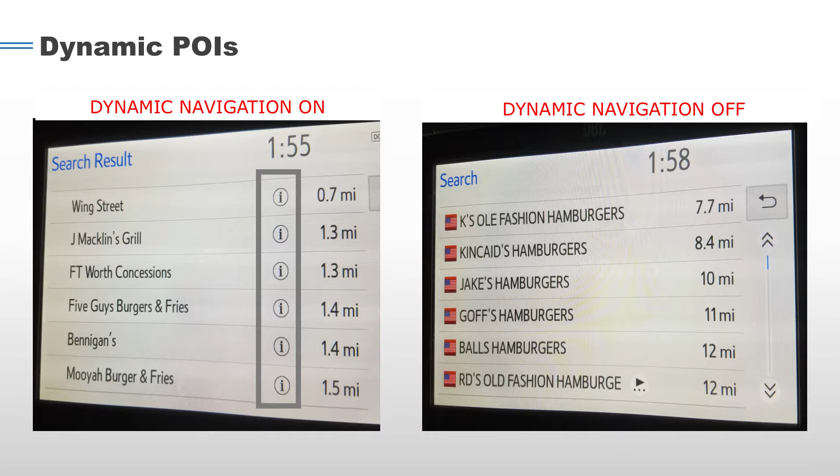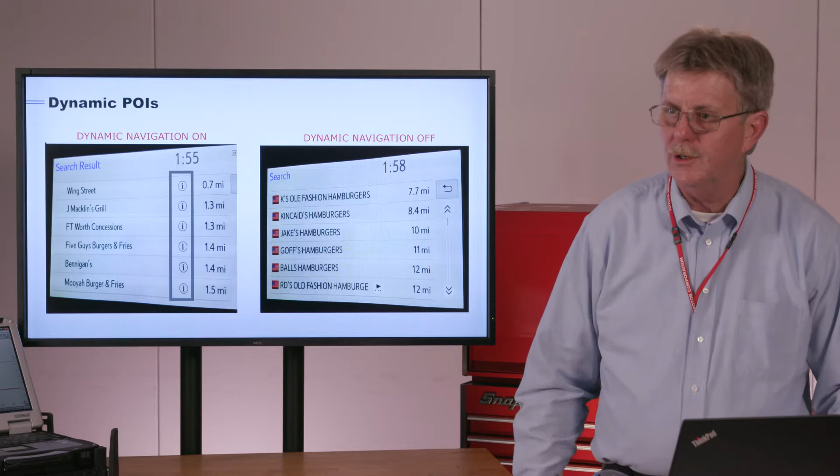Dynamic POIs. When dynamic navigation is off, you are searching the POI, the point of interest database that's stored in the navigation ECU. When dynamic navigation is on, you are also going to off-board cloud-based servers. So identical searches, notice they're only 3 minutes apart, the difference between the search results is that dynamic navigation is off and we're basing it on the stored map, versus dynamic navigation on where we get more choices, closer choices, and a wider variety of choices based on our restaurant search.

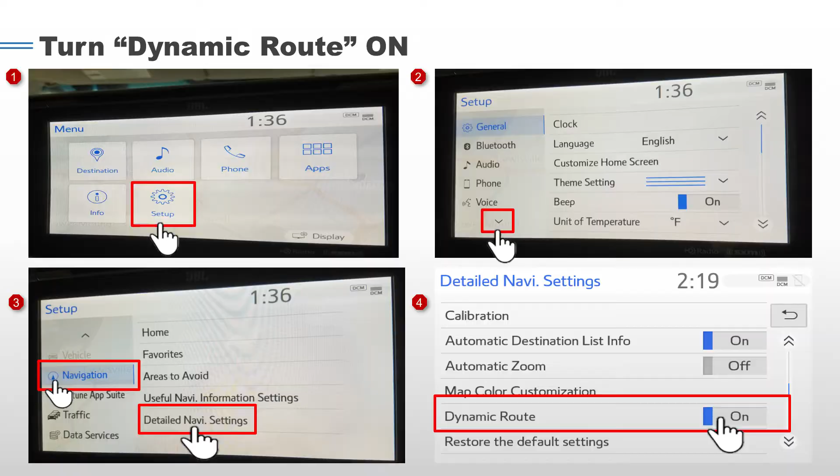To turn dynamic routing on, there's some steps involved. Setup, scroll down until you find navigation. You have to go into detailed Navi settings and you have to turn on dynamic route. It's not on by default.

App Suite Connect is our next subject. App Suite Connect is the Entune 3.0 app suite that is on the customer's phone and communicates with the head unit. Because this is App Suite Connect, it's available on all 3 levels of the system: Entune 3.0 Audio, 3.0 Audio Plus, and 3.0 Premium Audio.

3.0 Audio and Audio Plus are capable of displaying traffic incident information and weather forecasts. Their data source is through an app in the Entune app suite, so they can display traffic incidents based on your current location. You can change your current location or you can refresh the list.

3.0 Audio and Audio Plus weather, again, based on current location. You can change your location. You can have it display in centigrade or Fahrenheit, today's weather, or a forecast. Remember, the data source for this comes in through the customer's cellular phone via an app on the Entune app suite.

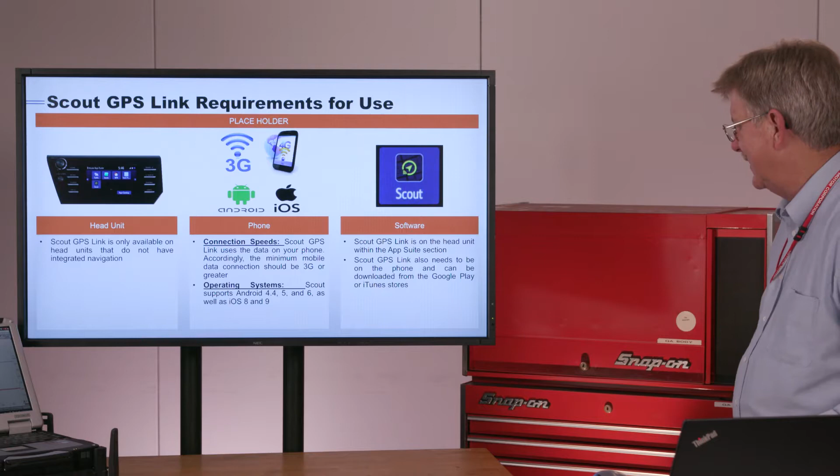Connection speeds depend on your cell phone connection speed, because remember, that's the data source. It supports Android 4.4, 5, and 6, as well as iOS 8 and 9. So whether you have an Apple or an Android phone, it's on the head unit, it's within the app suite section, and it needs to be on the phone. Again, remember, this is a separate download — you have to download both Entune 3.0 and Scout GPS Link.

This is another critical reference slide. Scout GPS Link tethering: to get the full moving maps function on Scout GPS Link, you have to have the cell phone connected via both USB and Bluetooth. There are options and details explained about what happens if you take a call on your cell phone, because remember, the cell phone is the data source for Scout GPS Link. So it goes back to turn-by-turn navigation. If you aren't tethered, it's not a full moving map application — it's turn-by-turn navigation.

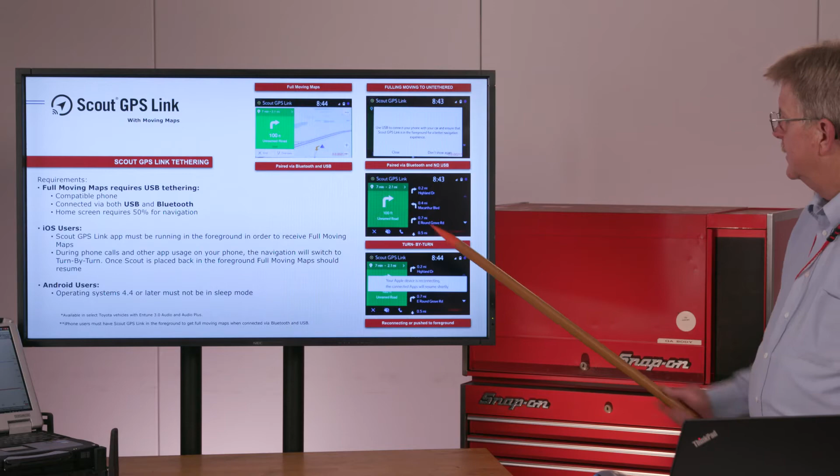If you're paired via Bluetooth but no USB, there's a message that pops up to say you're only going to get turn-by-turn navigation. If you take a phone call, it will default to turn-by-turn navigation, and again you'll have information. Once you hang up the phone, it will take advantage of the increased bandwidth from your phone and go back to full moving maps.

Entune 3.0, we're talking now about the app suite. The included applications are part of the 3.0 app strategy and features. App Suite connects to mobile applications through the vehicle's head unit. In the vehicle, guests can use their Pandora, Slacker, NPR One, and have their cell phone communicate or link to the head unit in the car. There are companion apps so they can manage their apps, customize, and handle registration features and functions.

The installation process is slightly different. Additional apps—the new App Suite design allows faster app development. We can hopefully expect to see new apps developed and added to the App Suite on a faster pace. Guests can manage their App Suite through their mobile device or directly through the head unit.

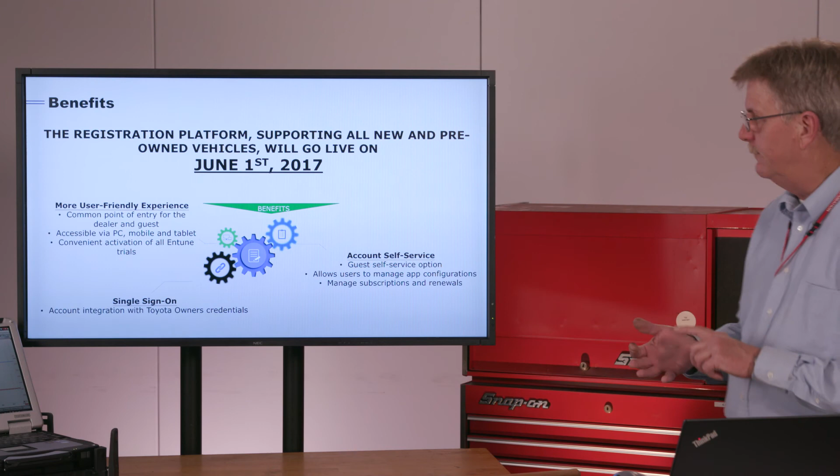It's accessible via your personal computer, via your mobile phone, via your tablet. You can link your Pandora, link your Slacker, activate all your accounts, opt into your Service Connect subscription, do all those other things via this single sign-on, account integration with the Toyota owner's credentials, and self-service for the guests.

The guests can go in and manage, configure apps, and do things like that via the Toyota owner's registration portal. They can access their registration portal directly at www.mytoyotaintune.com. They can sign in with their existing Toyota owner's credentials.

They can create a new account, or they can resend activation signals, because remember, we had a couple of different slides about different functions that required activation, a specific activation procedure, or a specific number on the head unit.

On their mobile phone screen through their Entune app suite, they can access the registration portal. There's a link to the website, and they log in with their existing Toyota owner's credentials.

On their desktop, once they've logged into their account, they can view their profile by clicking the View Account button, and from their profile they can manage vehicles, add vehicles, remove vehicles, enroll now, all those different processes or procedures.

Hopefully somebody at the dealership is helping them through this process. If the folks at the dealership have a question about how all this works, they have a handy registration simulator that they built, a clickable PDF that represents or steps them through the full enrollment process, so they can understand or train themselves, train each other on how to complete the enrollment process. It says we could train regional or dealer personnel. If you wanted to learn how this worked, this clickable PDF would help you become an expert with registration.